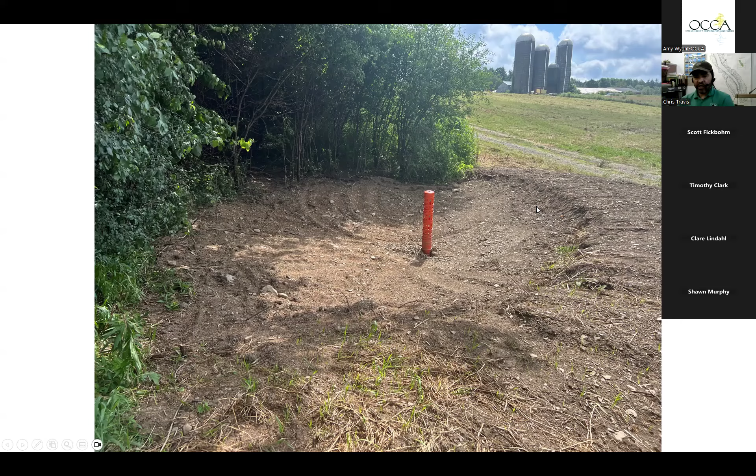Likewise, here's another WASCOB. This one you can see much more - not quite as well formed, much more of the topography working for us here. This is again the same farm, just a little bit further down, and the same excavator and contractor cleaned all three of these for us.

Likewise, this is on another farm field. We're not quite down to Skaneateles Lake, but we're getting there. As you can see, one of the reasons WASCOBs lose function and become less operational - one of the things that frequently gets us and our farmers in trouble - is operations and maintenance. O&M can be vital to the functioning of these BMPs within the 10-year lifespan of the vast majority of our BMPs. Granted, these had all exceeded their 10-year lifespan, which I think is standard for the WASCOB.

However, part of the reason that their functioning had decreased was because there had been no maintenance whatsoever. This particular WASCOB was all cattails, and actually we had to snake the standpipe there and try and figure out what was going on with the underground outlet because that was not functioning as designed.

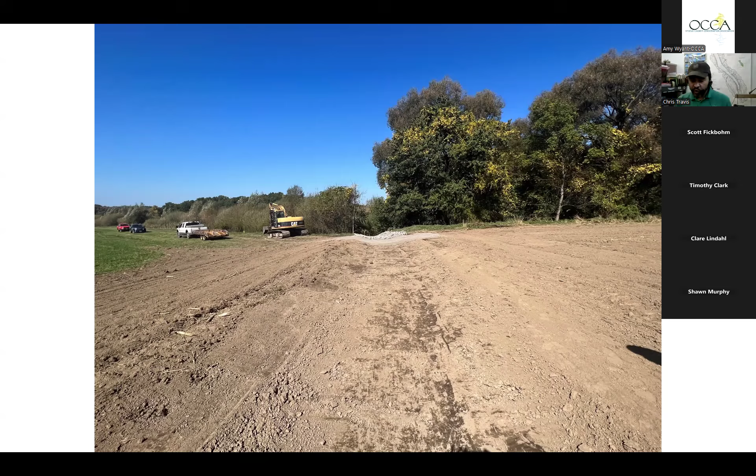So we proposed, and with the farmer's permission implemented, this 300-foot, I think it was 200-foot, diversion slash grass lined waterway. This is the implementation during, and this is after it was completed, and you can see our heavy straw mulch. And then this is, of course, me standing at the outlet now, Shotwell Brook immediately behind me, looking back up into the farm fields here.

So we really like the diversions in that they are minimally invasive, they are easy to implement, and they're very cheap. Most of the expense for these is honestly the stone, and sometimes, I guess, the excavation work if it gets really big.

Now, also in the foreground, just behind the outlet here, you see a broad-based dip. This is something we implement quite frequently here in Onondaga County, in that our diversions are often immediately adjacent to the outlets. We're right there by the headlands, and this is where we would want the farmer to be able to cross this diversion without damaging or rutting it. So quite a few of our diversions have these broad-based dips such that the farmer can still get his equipment across without rutting up our diversion per se.

This is another diversion, same farmer, other side of Shotwell Brook now. We were having similar issues up there in the distance where you can see that hay bale far away. So the water comes down the slope, and believe it or not, it would make a turn and come down towards our truck here. It's all based on the topography. And this was some quite significant rilling, and we had like some one and two foot gullies starting to form across this farm field.

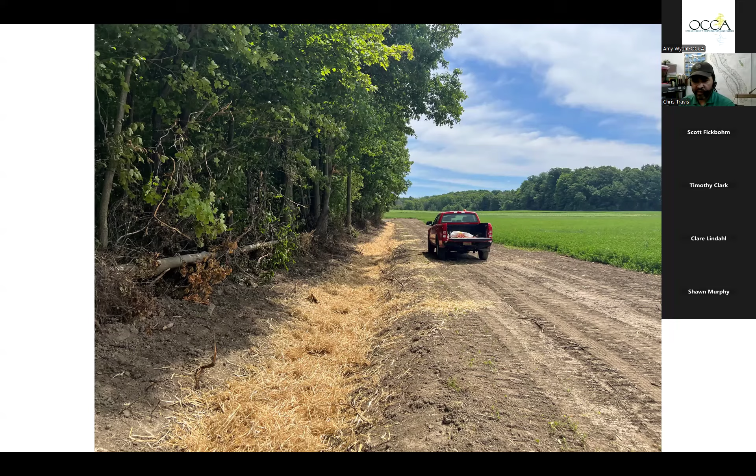And as you can see, it's shallow, it's deeper, but it's also quite a bit narrower. So this was just after implementation. As you can see, we've got the truck and we've got the hay. In the very distance there, you can see the interns doing the seeding and mulching for me.

So this is where the water came down. The water would come from the right, go across, get past this hay bale here, and then it would turn and head down there towards the trucks. Shotwell Brook is in the distance where you can see those willows popping up past the alfalfa. So with this, we're grabbing the water as it comes down the slope.

Once again we've got another broad-based dip so that the farmer and his equipment can cross without damaging the diversion.

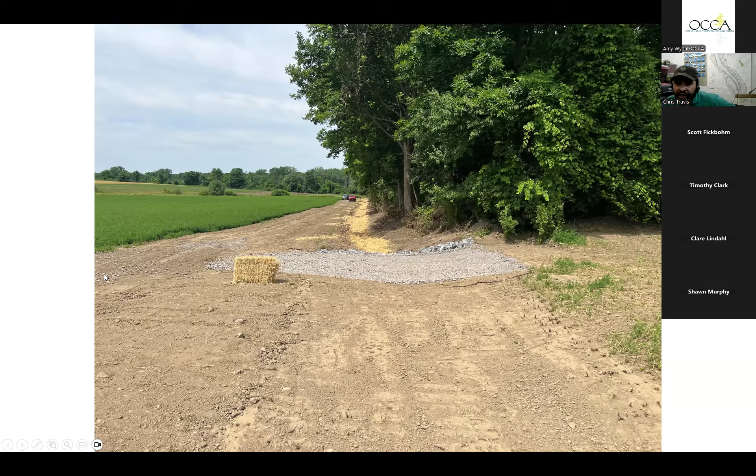And we actually put an inlet here so that some of the stone is so that during the high flow events, it's not damaging the inlet to this diversion. And so here, this is further on in the season, how it's going. I chose the picture without the velvet leaf because, well, I didn't want to show the picture with the velvet leaf. But this is the same diversion.

So as you can see, it came along pretty nicely. We've been out there in some real big storms, and it is functioning as designed and as planned. Once again, the efficacy of these is pretty much in the fact that they're really cheap and they're really easy. I think I've probably worked on 10 to 12 diversions at this point. Maybe 3 or 4 WASCOBs, and similarly 5 or 6 stream crossings, right? So that's another reason why I said these are the big three.

Nothing like being in your first staff meeting, and people are throwing around terms like WASCOBs, and I remember sitting there saying, "What in goodness gracious is a WASCOB?" And you're in government when everyone's speaking in alphabet soup, right?

So at any rate, continuing walking down. So Shotwell Brook is down there, and this is ultimately outletting into Shotwell Brook. Moving on, the stream crossing. So the stream crossing, another structural, not so much in the fact that we're trying to capture the water, but we are trying to decrease the turbidity and the potential for the sediment migrating, right?

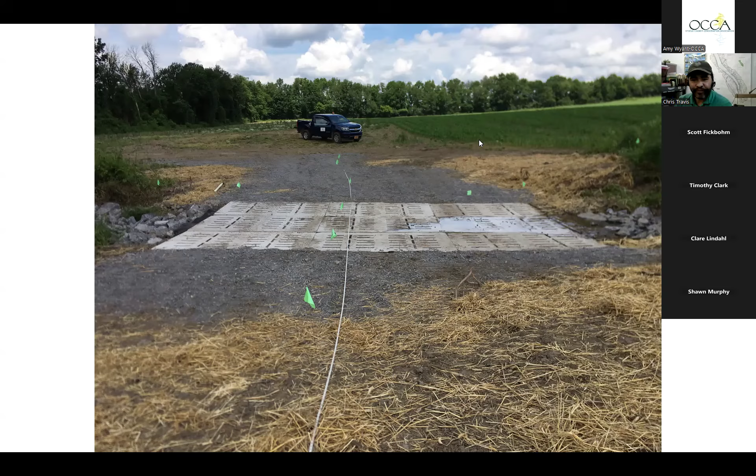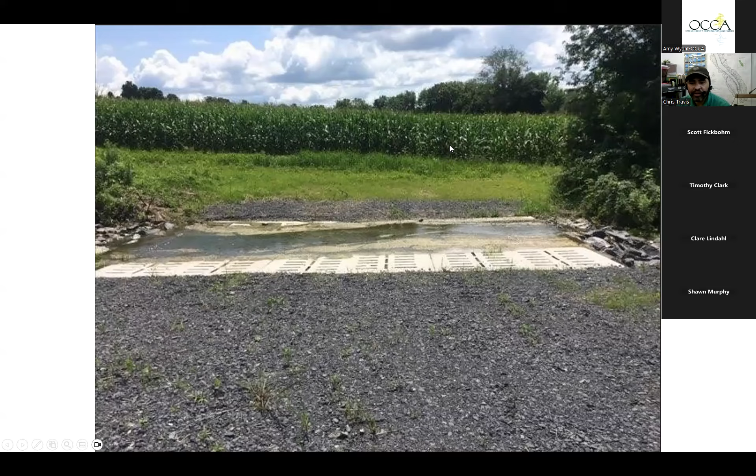This is it the following season. As you can see, the water is now moving over it, and it looks much more natural and established here. I'm not sure if this is when Tim and PJ came out to see it, but at any rate, this is another one I implemented on Grout Brook, the famous Grout Brook, at the southern end of Skaneateles Lake, from which award-winning trout are pulled every year.

This is one of our farmers down in the Homer, Cortland area. This one was also particularly a headache to permit through the DEC, but all things being equal, we got it in. So this was obviously a much smaller crossing. That is what you would expect in your usual farm crossing. And this is what it looked like a season later. So you can see that the substrate has started to move over it. It stops looking so much like a bunch of cattle slats stacked in a stream, and starts looking more natural.

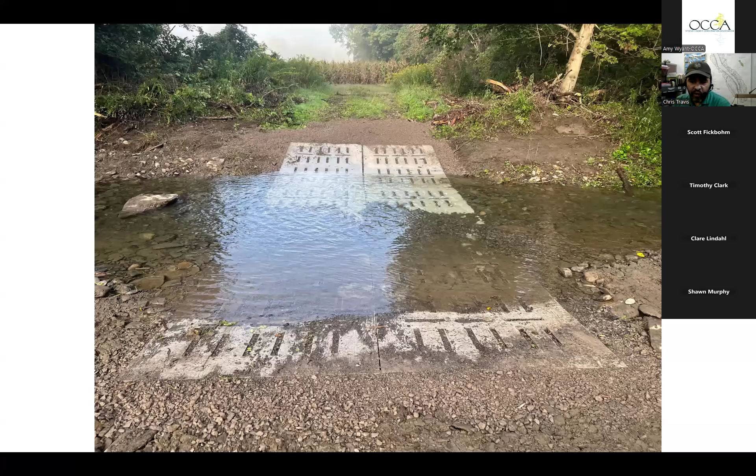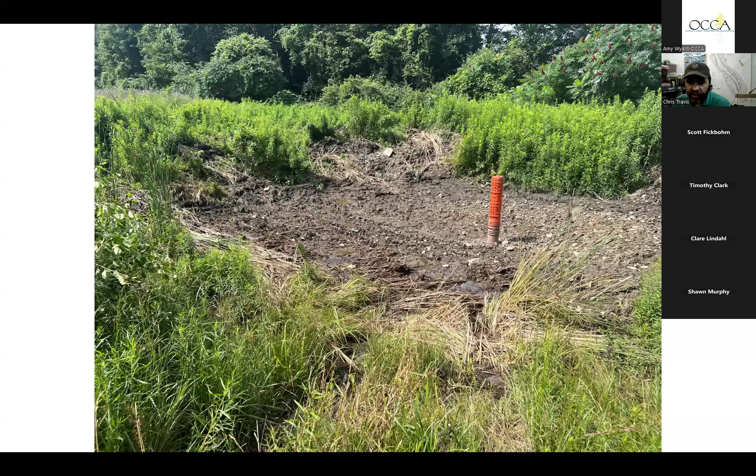So, as usual, I talked way too fast and got through my material far too quickly. So I'll just return to one or two topics that I kind of breezed over. I don't want to hit on it too hard because I know Tim has a wonderful set of classes on Udemy, where you can learn to do the stream crossing and you can learn about hydrology. And that is something that is encouraged in all of our soil and waters, that you take Tim's classes, which is where I was first introduced to the stream crossing BMP.

That's why I didn't want to get into this too much, but I did want to mention again these programs. EFH2 and EFT are very helpful for the design process. Of course, you can pull out your chapters in NRCS 650 and do these by hand, but having these programs facilitates the design process enormously. EFT, Engineering Field Tools, is a little bit clunky. At one point, my IT department made me pull it off because it was apparently a risk for hacking. So it's also something to keep in mind that sometimes these programs are not quite as functional as you would like them to be.

And also, we frequently need to check for the most recent update to minimize our risk, because these days we all know that the risk of bad actors is pretty prevalent. So that was the long and short of it. Chapter 7 in the NRCS 650 is grassed waterways. Chapter 9 is diversions. Chapter 8 is terraces, terraces slash WASCOBs. Obviously, I'm not getting into the design process here, but pulling out one of those chapters will walk you through it in intricate detail.

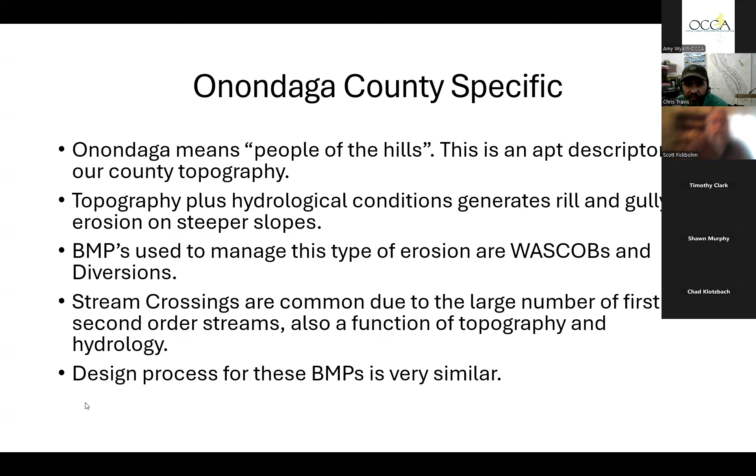Great answer. Thanks. Yeah. Chris, I wanted to thank you for your presentation. I also had my hand raised, but I want to give other folks the opportunity to ask questions of you in the remaining minutes that we have here. So if anybody has a question, now would be a good time. I have a couple, but go right ahead, Scott. There is one question in the chat.

It says, has the state considered moving over to using HydroCAD? I know that at our symposium last year, they did a HydroCAD training. I did not sit in on it, but I do know that it is being taught to our technicians. The issue we have, and I'm sure you guys can relate to this, is that so many of the soil and waters are these sort of autonomous units, and they don't all function under the same software suites. I mean, everyone's got Word, but we don't all have CAD.

We don't have CAD in this office, so that's why I try to use EFH, right? I can bug my director to get us CAD, but we all know that sometimes works, but sometimes it doesn't. And also, these subscription services now, right?

So it's several $1,000s a year for the CAD. And actually, what he's asked us to do is research open source software this winter. So, QCAD and those sorts of things. He's asked us to look into that because I've expressed if I'm going to do this FEPE thing, I should probably have a CAD resource that I can use.

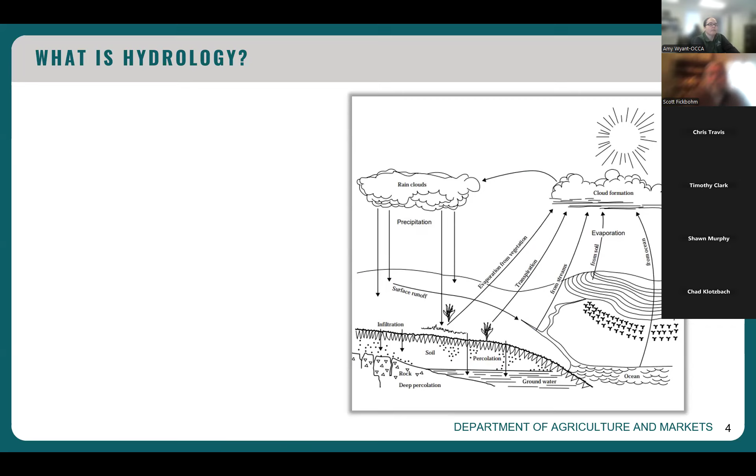Right into the background section, just a brief overview of what is hydrology. Hydrology is this cycle of water that goes across the land. Some goes into the ground, goes into the oceans, comes back up into the sky, makes clouds. Clouds form rain, and this whole hydrologic cycle is what we are referring to when we say hydrology.

It's the properties, the distribution, and the movement. So not only just where the water's going, but what is it carrying? What salinity? What are the properties of it? Land, underground, oceans, and atmosphere.

And what we're most concerned with in conservation work is called runoff hydrology. We're looking at rain that falls on the ground, runs off through a watershed down to a design point.

So these are some practices that need hydrologic designs. Some of them that Chris covered in the first presentation: diversions, terraces, urban closed drainage networks need this kind of design, flood control, green infrastructure, stream restoration, culverts, manure storages—basically everything that's out there on the landscape that can be subject to rainfall. You need some sort of design of how much rainfall is going to come down to it, and a way to either get rid of it or manage it safely.

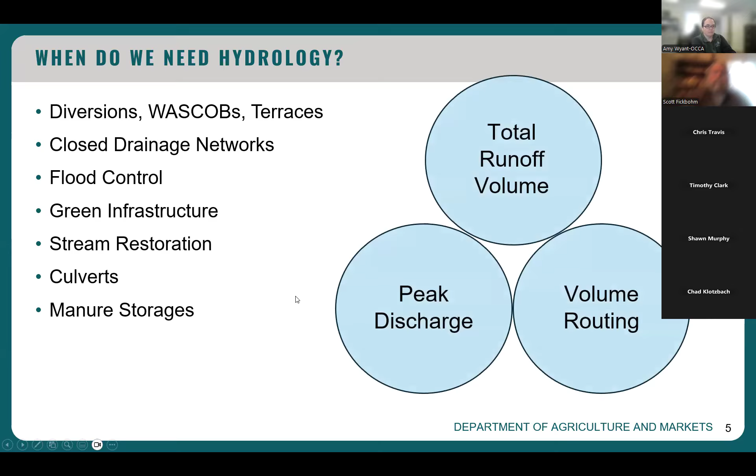I look at hydrologic designs as three different practice areas, if you will. The total runoff volume, that's how much rain runs off the surface of your watershed. And then other practices will need to know the peak discharge—that's at a design point down further in the watershed. You're going to have to know how much water per second is flowing past your point. That's different from total runoff volume; the total runoff volume is just a volume, it doesn't have anything to do with the flow rates coming down through a stream. That's peak discharge.

And then a third component, which we're not really going to get into in this course, is called volume routing. That's where you model a volume of water that is moving through a system or a structure—say moving a large volume of water under a bridge, through a sluice gate, over a dam, or through a spillway. That gets more into hydraulics, but it's an associated part of hydrology.

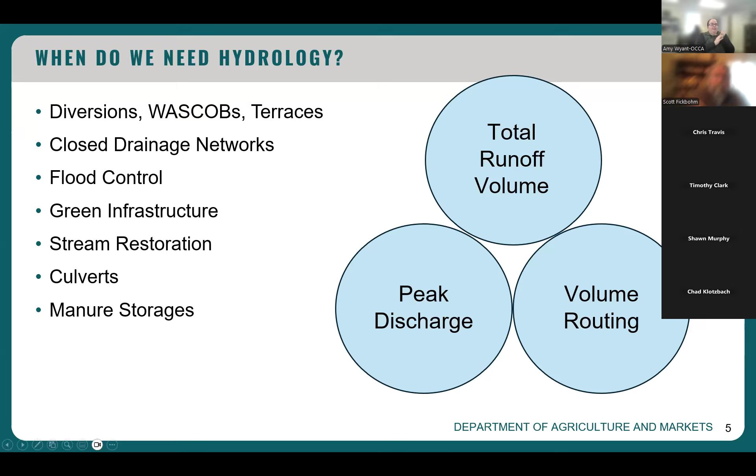We have a few different methods for completing hydrologic models or hydrologic designs. I think the best source of information is usually stream gauge data. That's when you have a bridge and there's a gauging station at the bridge that records stream flows there for every minute or every hour. That's really the best source of information. If you have a bridge at a gauged site, that should be the information you're using to do the design.

The next best are called regional curves, and these curves are scientifically derived from stream gauge data on a regional basis. You wouldn't develop a regional curve for the entire Northeast United States or even the state of New York—you develop regional curves for smaller ecological or weather regions in the state. So these regional curves are what StreamStats is based on. The scientists that developed StreamStats created all these regional curves, and they created regions across the state that have uniform weather patterns and uniform topography.

Next best is where we get into hydrologic modeling. These are the SCS or NRCS methods, and that's the focus of this presentation. For rural hydrology, we'll be using the EFH2 method. For urban hydrology, typically we'll use TR20 and TR55 with some more advanced time of concentration methods we'll get to in a minute. Last up, I want to mention the rational method. This was the first hydrologic method I learned when I was starting. It's used mostly for storm sewer systems, a kind of simplified method. It gets the job done, but it comes in last place here.

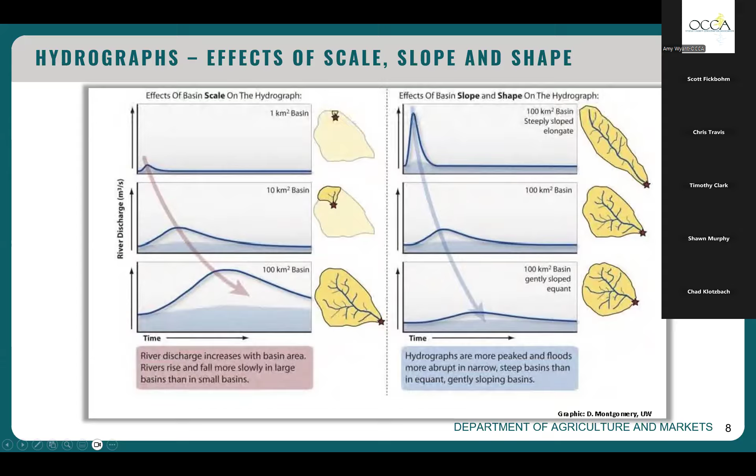Throughout EFH2, there will be warnings and caveats, like don't use this procedure for complicated situations, particularly if there are ponds, wetlands, or storage in the watershed. They give guidance to use the procedures in NEH 630 instead. That's another chapter in the National Engineering Handbook, just called Hydrology. So remember, there's the Engineering Field Handbook, which is inside the National Engineering Handbook — this is just another chapter that covers hydrology in extreme detail, with hundreds of pages on a ton of different topics. As you might expect from hydrologic modeling, they suggest the state of practice: split the watershed up into smaller sub-catchments, model storage individually, and break it up in as much detail as you can if you have storage, ponds, or wetlands.

Okay, any questions on this introductory part? Going to move into rainfall.

Rainfall, the way we bring rainfall into hydrologic modeling, is with rainfall distributions. This is like how intense the rain falls over a theoretical storm. We use these 24-hour storms as a theoretical storm that we can drop over the landscape and run through our practices, and it kind of represents a bad thunderstorm in the summer. Historically, we had distributions called type 2 and 3, and I think there was a 3A, and they sought to mimic rainfall patterns in different parts of the country. I think most of New York was type 2, Long Island was a different type. Anyway, there's a storm duration of 24 hours, and the intensity of rainfall varies over the storm period.

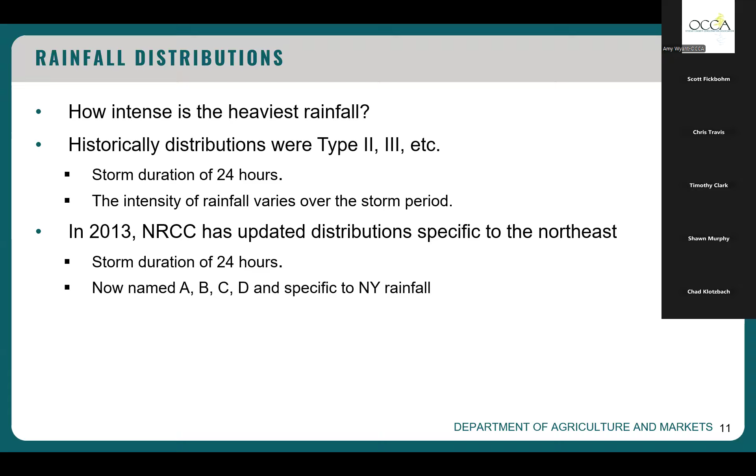So there's basically two ways that we get rainfall depths. I guess three, I forgot about the Cornell data. I recommend most people, if you're going to try and do a site-specific rainfall, to use the NOAA Precipitation Frequency Data Server. That's NOAA's official website, and it's updated with all the latest and greatest. It's an interactive map. You go to your site and you click it, and that's how you get site-specific data. A lot of people that use HydroCAD modeling will use site-specific data. It's kind of the best practice.

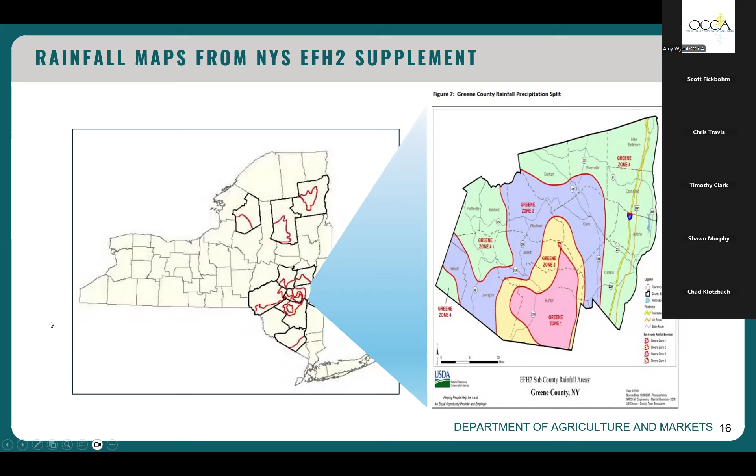This is in the EFH2 supplement, and it's also kind of baked into the EFH2 software. But in the supplement, there's these charts where you can check the rainfall values. So for each county, if there's separate regions, it'll give different rainfall values for those 2 regions.

All right, so moving on from rainfall, we're going to quickly go through mapping a drainage area. Any questions on rainfall?

Tim, I had a question on rainfall. Go ahead. I'm sorry, I'm not familiar with these processes and I'm prone to asking stupid questions, so this may be one. The distribution maps that you were showing, is that the distribution of the amount of rain that falls? In other words, are these types, like where a lot of rain falls, and type D where not a lot of rain falls over the course of a year or some time period? Or, are there parts of the state that are particularly dry or particularly wet?

No, it's taking a storm and trying to predict how intense the most intense rainfall is. So in the synthetic distribution, we have this middle part of the storm where most of the rain falls. So curve D has more rainfall in the first part of the storm and the last part of the storm. Curve A, the blue line, has the least amount of rainfall in the beginning and the end, so curve A has the most steep part in the middle of the storm. So they're saying that curve A has the most intense of the intense rainfalls.

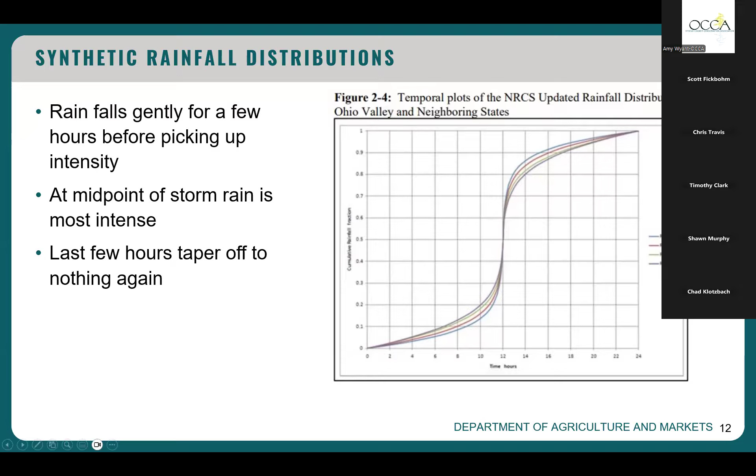So if you jump back to the map, it's trying to gauge which regions have slightly more intense rainfall during the most intense period, it's not even a big difference. And it's just based on aggregating rainfall storm data over the last 40 years. Thank you for that.

So mapping a drainage area, if you want to do a hydrologic study, you'll need to know what your drainage area looks like and how much water's coming down to it, to your design point.

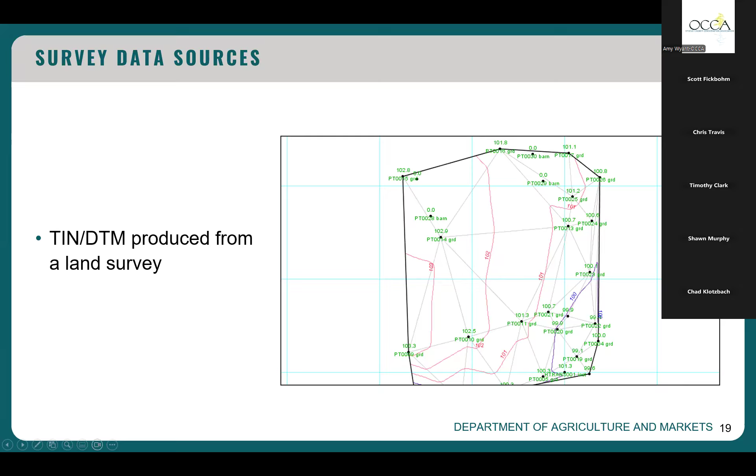In the worst case, you'll have USGS mapping. This is not as detailed as the other sources.

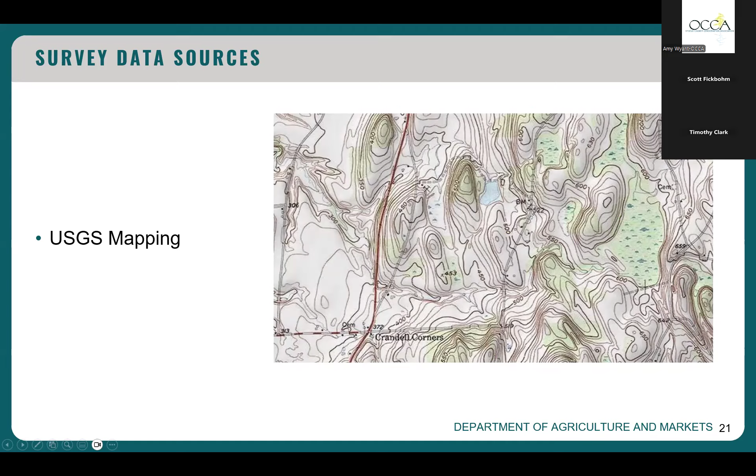And then to map out a drainage area on something like this, we got to start from your design point. That's going to be the place where your built practices, your WASCOB, or the outlet of your diversion or grass waterway is. You work up through the watershed going perpendicular to contours.

There's some general rules. If you're on the nose of a hill, your watershed's going to go perpendicular right down the nose of the hill. If you come to a saddle, that'll be a divide in watersheds. If you're on a water course, the contours always point up the hill.

And like when we do in-person classes, we'll do a bunch of exercises where the students delineate a watershed, because it's pretty important. Even today with software tools that kind of do it automatically, you need to have some ground truthing experience to be able to pick out little errors and stuff.

So for this watershed, this is an example delineation. It's somewhat subject to opinion and interpretation. For example, coming up this slope, it's possible that it reaches all the way to the peak, or it's possible that the water splits and diverts below it.

Ditches often have an impact that's not visible in LiDAR, or sometimes not picked up on ground surveys. So the ground truthing aspect — whatever level of risk you're willing to assume with kind of the shoddy modeling, you have to make up for that with ground truthing. So if it's a really key important structure, you've got to make sure you're out there checking where the ditches flow and if there's natural impediments that weren't picked up on your survey.

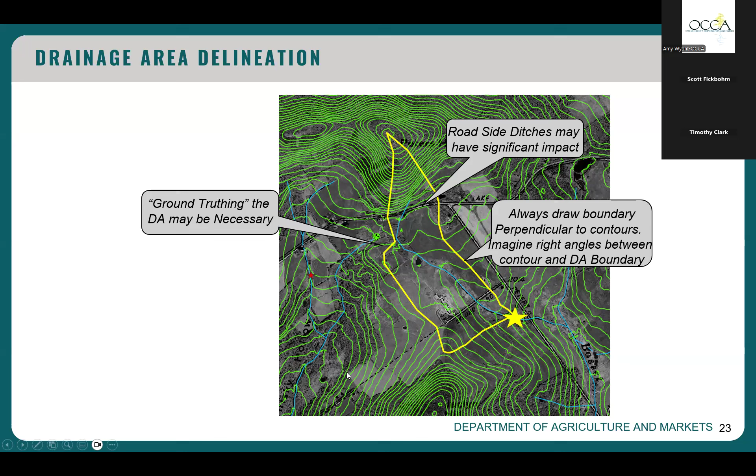Want to mention StreamStats. Hopefully most people are familiar with that. This is a pretty old screenshot, but it looks kind of the same. StreamStats lets you delineate the watershed from these blue lines — I'm not sure if they're just the blue line stream network, but it has to be pretty much a delineated stream in order to do the watershed. You can't just pick a random point out in space, but it'll delineate a watershed and do statistics for that.

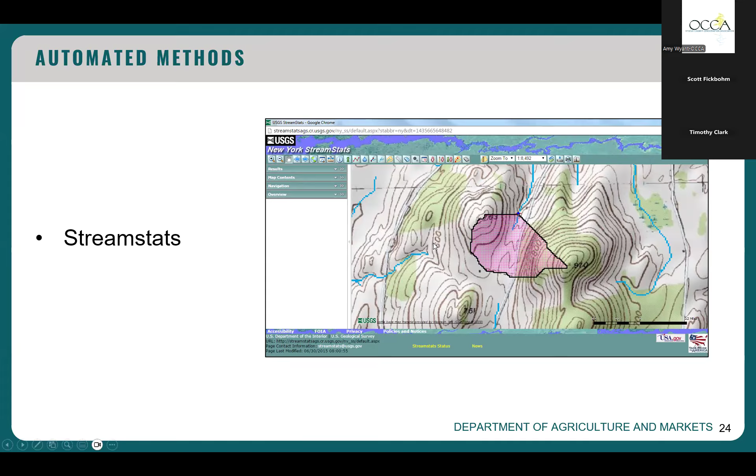And you can export this into GIS. Speaking of GIS, lots of people use GIS tools to delineate watersheds, and there's pretty good LiDAR data for the entire state. This is a screenshot from the NRCS engineering tools for ArcGIS Pro, which is a good hydrology package.

It's kind of being phased out in favor of something else, but districts can use this. It's a little bit buggy. Anyways, it's an example of a software tool. It uses pretty much all built-in tools in ArcGIS Pro. So if you're just doing it on your own, you also have access to these delineation tools.

I'm going to move out of delineating the watershed. Any questions on that?

Our next topic is runoff curve numbers. So this is where we get into trying to figure out how much of the rain runs off the surface of the ground. And it's governed by an equation — this is the NRCS runoff equation.

I don't expect you to memorize this, but anyways, Q is the runoff in inches. It's a little confusing because sometimes we use Q as a flow rate for hydraulics — but in this case, Q is just runoff in inches. P is rainfall in inches. Ia is initial abstraction, and S is the potential maximum retention after runoff begins.

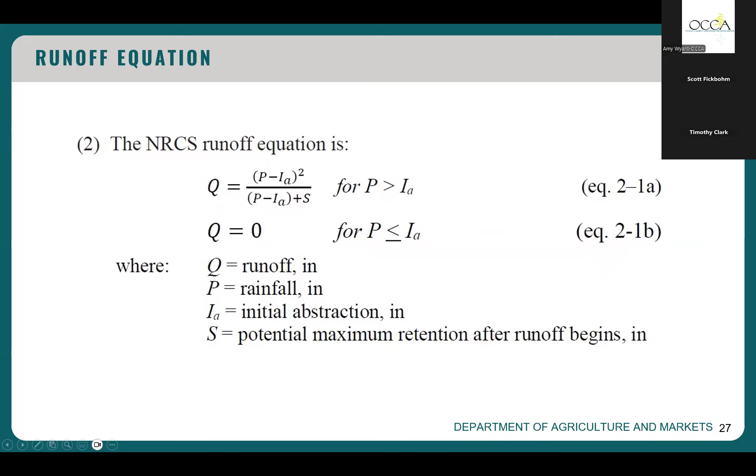And then, going back to the formula, hydrologic modelers simplify these formulas. So they have a simplification for this, which becomes this one. So the flow rate is this term if the rainfall is greater than IA, and then the runoff is zero if rainfall is less than IA.

So, like I was having you imagine a minute ago, if your rainfall is just a very light storm and doesn't go over the threshold of the initial abstraction, you won't get any runoff. And that kind of makes sense, especially think of a hot summer day, a very light rain, on an asphalt parking lot that's 200 degrees. You won't get any runoff from that if the rainfall is light enough.

Runoff curve numbers are just kind of, I don't want to say imaginary, just a convention that's been created to use to model different surfaces. So the curve number itself doesn't have any relation to a physical attribute. A lot of people will get confused and think that the curve number is the percent of runoff. That's not right. It's an abstract term.

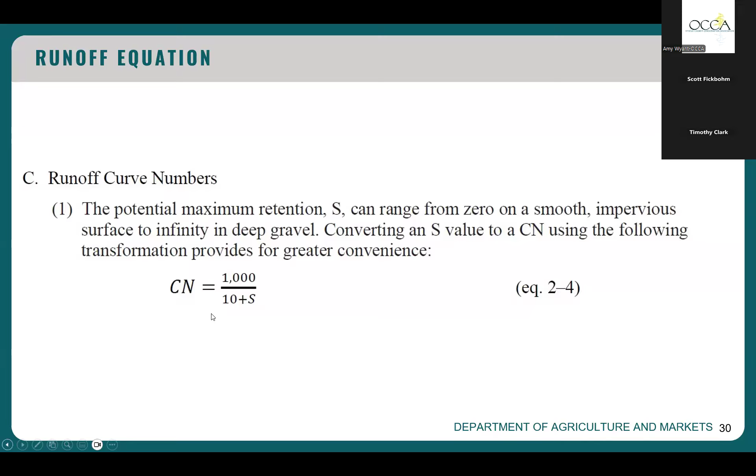So in the literature, curve number is 1000 over 10 plus S. S, if you recall, is the water retained after runoff begins. So initial abstraction is the water that's retained before runoff begins. S is the water that's retained after runoff begins.

Shoot, I thought I had a different slide in there. Yeah, okay. So we're just doing curve numbers. So this is the curve number that's 100. It generally goes from 40 to 100. There's a mathematical error if you use a value less than 40, it's like a divide by zero error.

Okay, and if you're using the EFH2 software, all these curve numbers for different land uses are listed in the RCN tab. Similar for HydroCAD, it has all these curve numbers built in. Basically, for each land use, say you have woods-grass combination, you'll get 3 different scores, a poor, fair, and good condition. And then for each hydrologic soil group, you'll have a different value. A soils infiltrate the best, D soils infiltrate the worst. So the curve number values will always be higher for the D soils than for the A, B, and C soils.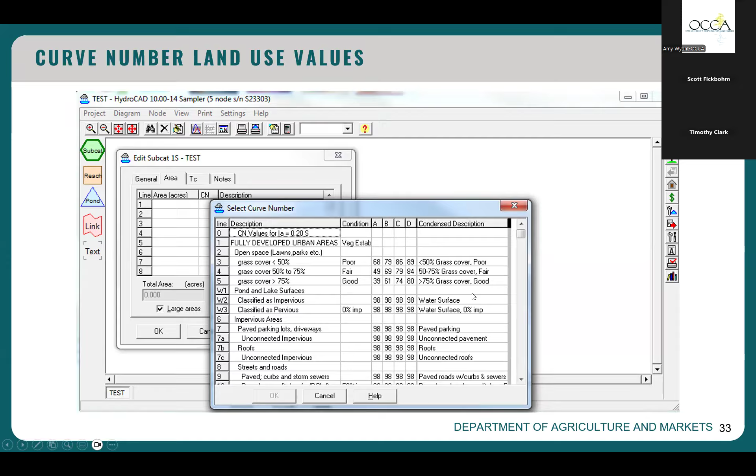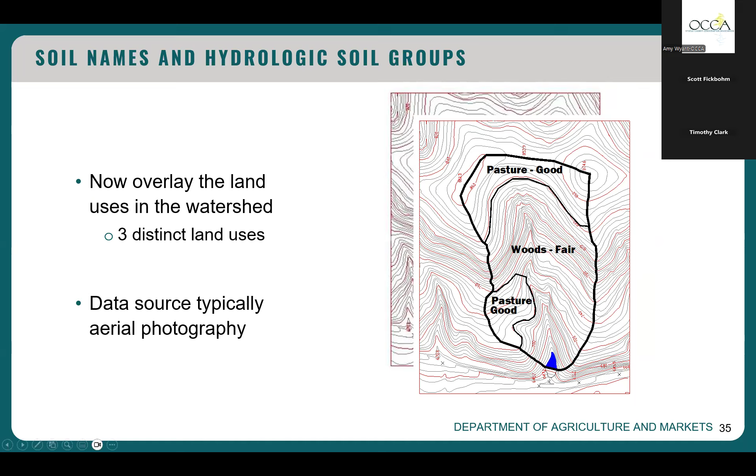Once that's overlaid, you'll get a bunch of intersections, which splits the watershed up into a bunch of sub areas. So in this example, we have 5 unique sub areas with unique ground conditions and hydrologic soil groups.

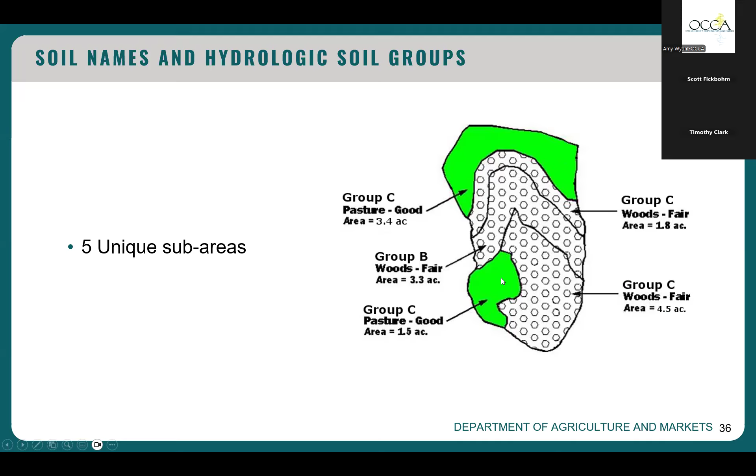And then for an entire watershed, common practice is to compute a weighted average of all these curve values. Each software I mentioned, EFH2 and HydroCAD, has these calculators to help you compute a weighted average curve number for the watershed to use for your model.

All right, so that is kind of a brief overview of curve numbers. I'm going to jump into runoff volume. Maybe speed up a little bit here. Runoff volume.

I'll just throw out an example. Say you have a site, you've computed your curve number like the previous method or the previous slides. You've computed the curve number to be 80, and your site receives 4 inches of rain. How many inches of runoff are produced? This is like an erosion and sediment control question. We use this kind of inquiry to size a sediment trap.

You can go to your curve number chart, look for the 80 curve, which is this yellow one. You start with your rainfall at the bottom, 4 inches, read up on the chart to the yellow line of 80. And then read to the left, which will give you direct runoff Q in inches. So if you have a rainfall of 4 inches on an 80 curve, only 2.04 inches of direct runoff will come off that watershed.

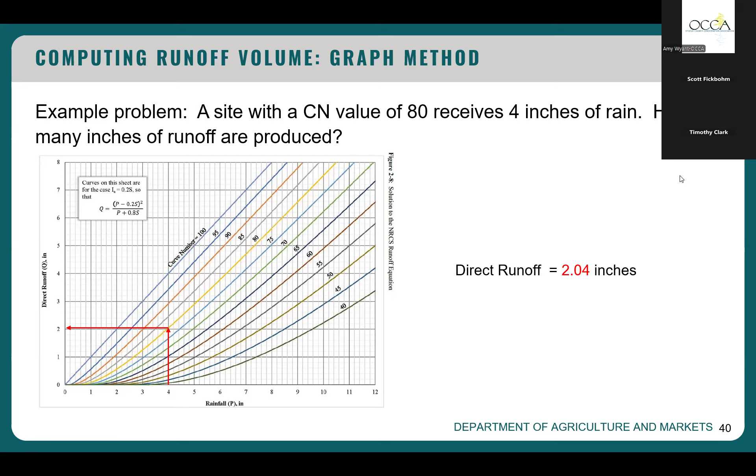All right, that's just inches. You would have to multiply that by the area of the watershed to give you a volume, storm volume. And just for your information, there's charts of a lot of this stuff. This is in the EFH2 chapter. You can go to a chart, and it's kind of the same basic information. Rainfall in inches, runoff curve number, and it'll give you the inches of direct runoff for those storms.

So here, again, we're going to 4 inches, reading over to the 80 curve, and it gives you 2.04. So if you have a problem where you need the storm volume, that's the procedure to get there. To get the peak discharge is a little more complicated, and we're going to get into that next.

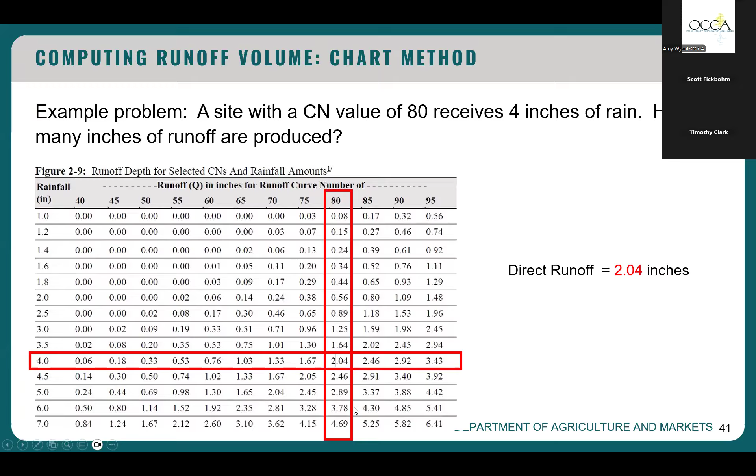So in order to get a peak discharge, we kind of have to know how fast the water runs off your watershed. Remember that slide back near the beginning, different shaped watersheds have different times for the peak flow to get down to your design point, depending on how steep the watershed is, how big it is. And the way we model that is called the time of concentration.

For urban hydrology, there's various methods, usually involving breaking your longest flow path into different segments, which can often include gutters and storm sewers, gutters and ditches, that kind of thing. Typically for rural or agricultural projects, we'll use this NRCS lag equation. It's meant for rural watersheds where you don't have a bunch of built infrastructure carrying the water along. It uses these terms: the flow length, the curve number, and the average watershed slope.

So in order to compute the time of concentration, you'd be looking at the flow length. It's just a length through the watershed of the maximum flow path, from the most distant point all the way down to your design point. So that's a flow length in feet. And then the average watershed slope. I recommend most people use GIS tools these days. Spatial Analyst can just do an average inside your watershed over a LiDAR raster. That's the easiest method.

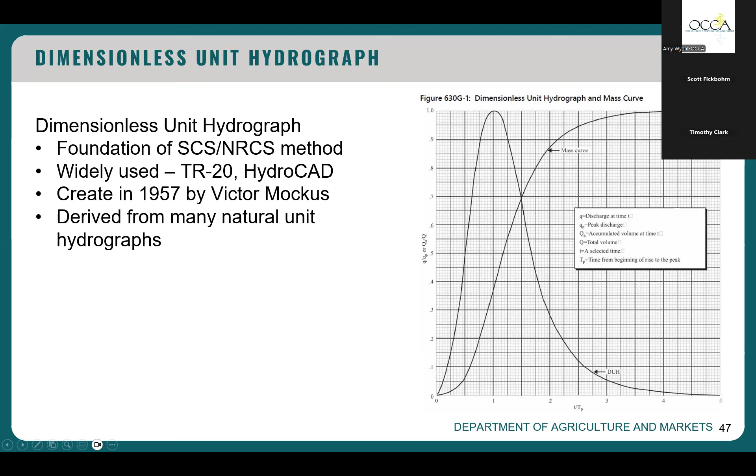So basically, this is a dimensionless hydrograph with no set values for time or discharge. And then we use software to map this shape onto our real design storm, real rainfalls. Part of the derivation for this peak discharge method uses the equivalent triangular hydrograph. There's a derivation for this in NEH Part 630.

If you're interested in learning more about the unit peak discharge method or equivalent triangular hydrographs, you're basically looking at how much rainfall falls in the first part of the hydrograph, and for the one that Victor Mockus came up with, it's 37.5%. I'm not going to go through the whole thing, but if you know 37.5% of the rainfall is in this portion, you can use that information to divvy this up into little segments, compute the flow rate at each point and the peak discharge.

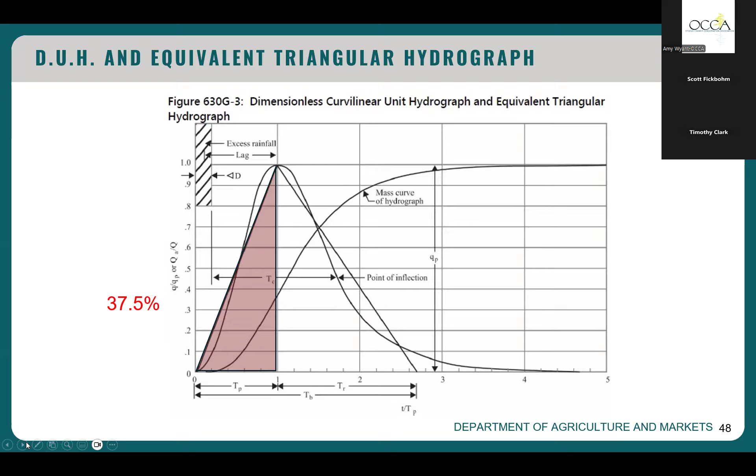If you're using software, EFH2 is commonly used by most of the districts. As we discussed before, HydroCAD is in pretty good use too for more complicated designs, and a lot of engineers use it.

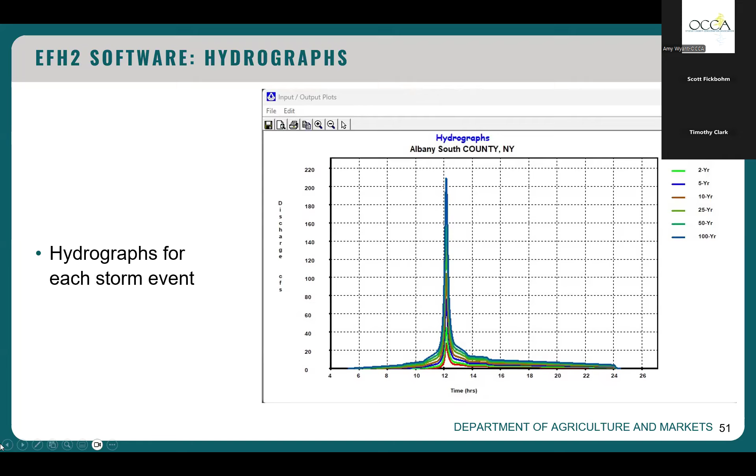So if you're doing it as a design where you need, say, a drawing of a hydrograph and a peak discharge, you can use EFH2 and lag method for the time of concentration to get that. Again, if you're doing a design where you just need the total runoff volume, you can pick that up off the curve number chart. And if you need to do design where you're routing a volume through a built structure, you want to use HydroCAD to model that in more detail.

So that pretty much wraps up my overview of hydrologic modeling. Kind of glossed over a lot of areas. So if there's any detailed questions, feel free to shout those out.

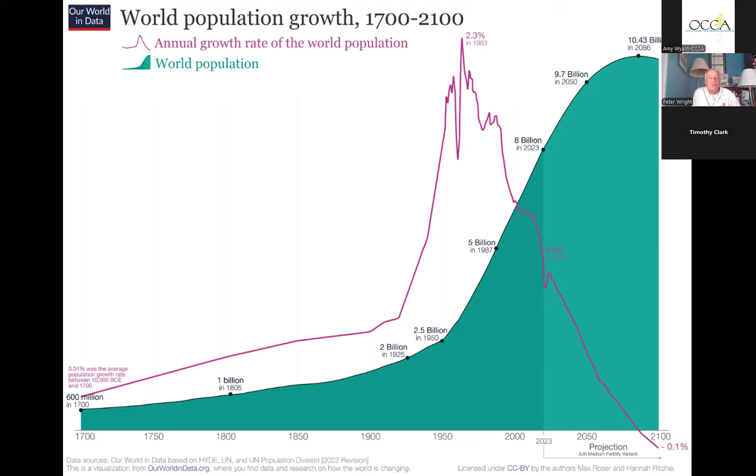Okay, why do we care? We care about agriculture. Agriculture is vitally important because we've got to feed the people. And it's important to know that we've got to feed the people as we get more and more people, with the same amount of land. We've got to do it, and we've got to do it sustainably. And I think that's our challenge, right? To move our agriculture system towards sustainability. And that's going to take a lot of engineering.

So there's this broad spectrum of what agricultural engineers can do. And I think as you get involved in it, you have to experience that whole spectrum. It includes functions of civil engineering. All that hydrology could be right in civil engineering. Mechanical engineering, got to know how structures work, valves, pipes, pumping, that kind of thing.

Environmental engineering, we talked about sustainability, and that's all the processes involved in protecting the environment as we're dealing with agriculture, which includes erosion control, right? Water management, those kinds of things. It does bring in biological engineering, though, and I think this is the unique aspect of it.

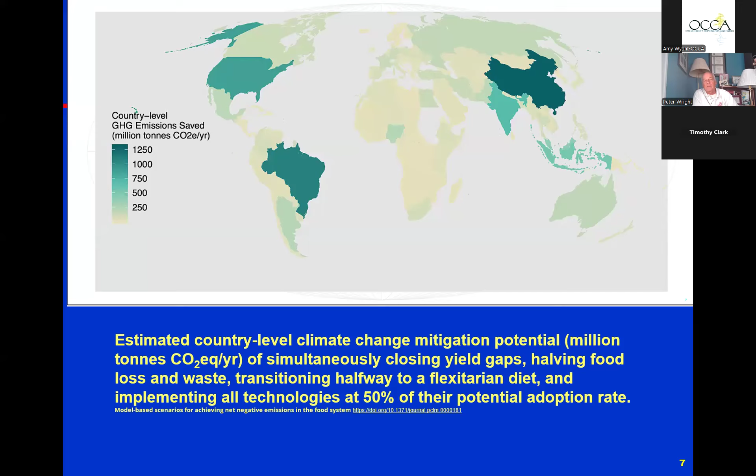And of course, where can we deal with this? And you see the U.S. does have quite an opportunity to make a change in the progress of global warming. We hit on this already, and so certainly thank Chris and especially Tim for talking about it. There's no question we're getting more and more extreme. The amount and peak of runoff is increasing. We're going to have more and more of a problem.

Engineers have got to figure it out, got to be able to deal with it. And that, of course, is part of the issues that have already been brought up.

One ethical issue that comes up is, okay, we know what the 50-year storm is now. So if we're designing a 50-year practice, wait a minute, what will the 50-year storm be 50 years from now?

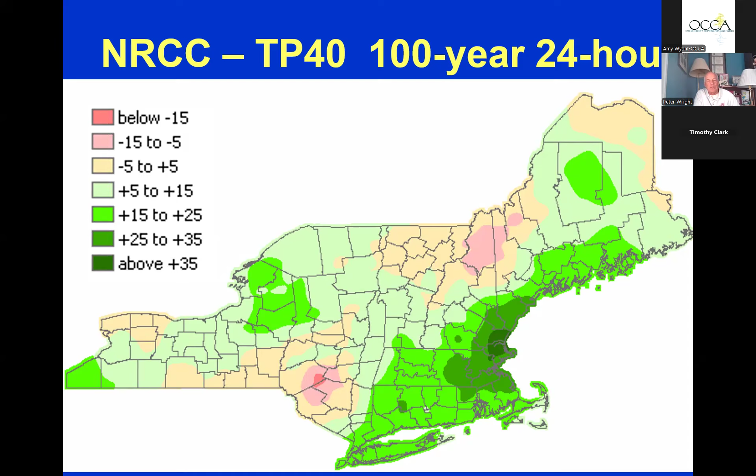And should we design for that? So the world is changing, and we have to figure out how to keep doing it.

So with climate change, here's the issue. We have more and more extreme events, so we need more and more runoff control. We've got to deal with those extreme events with either runoff control or even getting out of the way of the water.

One of the professors said the problem is not flood control dams. The problem is our cities, our houses, and everything are in the wrong place. We put them where they were close to water. Maybe we should move them out of there.

I'd tell that to everybody on the ocean, right? Don't live on the ocean.

The issue with precipitation, though, is in the Northeast particularly, we're going to get more and more of it. It may come in a fast amount, but we're going to get more and more of it overall. So drainage will also be a big issue. I think there's going to be much more emphasis on drainage.

Chris, as you design those WASCOBs and run the tiles down, I'm hoping you're providing enough capacity for drainage to those fields that can move into that same tile line. That would be a good thing.

Now, the other problem is not only are we going to get more rainfall, it's going to come at different times, and we are definitely going to end up with more droughts. It's going to be hotter, and there will be longer drought periods.

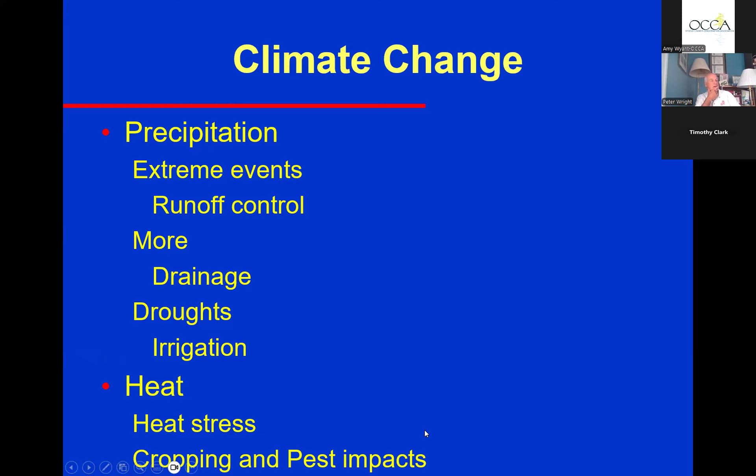We want to put the nutrients out at the time when they could be most optimally used and not lost to the environment, and that involves storing.

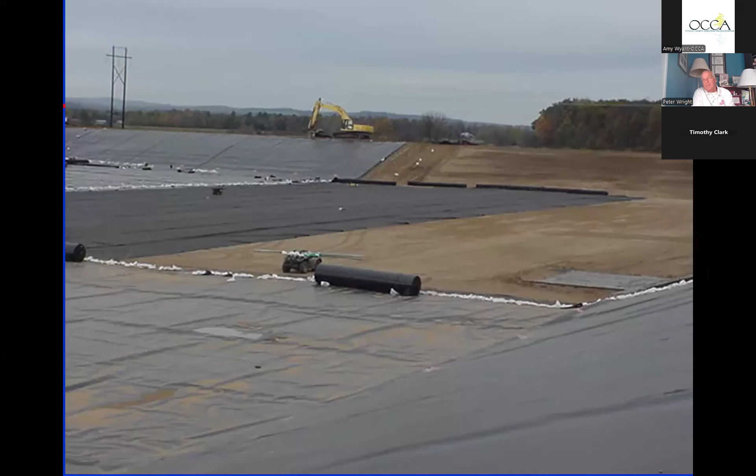Of course, there are a lot of different ways we can look at this. Who wouldn't want this on their farm? This is a wonderful storage, at least until it comes time to empty it. There are different materials for storage. We have concrete, we have earthen storage, and more.

I'd like to say the easiest ones have been done already. Farms that have the clay have the location for earthen storages. A lot of them have been built.

And now we end up with a more engineering solution to it, to put in liners, and you can see that's quite an operation to put those liners in.

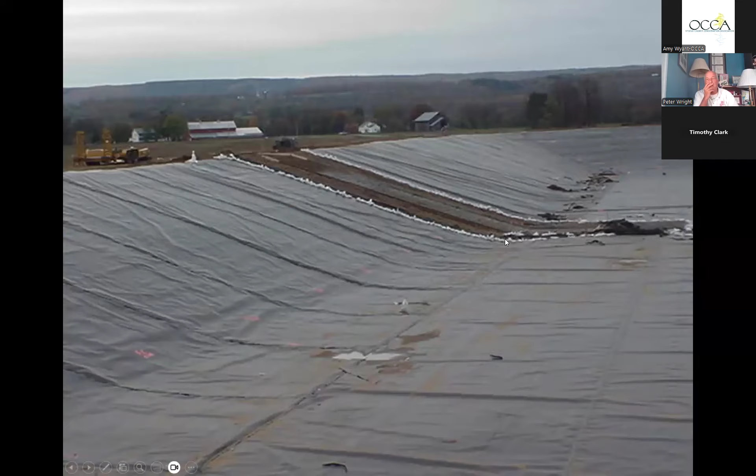We're collecting the rainfall water, which should be fairly clean, and we can pump that off, and that's water the farm doesn't have to deal with. We also, though, have the gases that are collected under this.

We can utilize and flare them so that it's not methane loosed into the atmosphere, but just carbon dioxide, which has a lower global warming impact. I might add that the carbon dioxide we'd be emitting after a flare actually equals the carbon dioxide that the plants took up to produce energy for the animals.

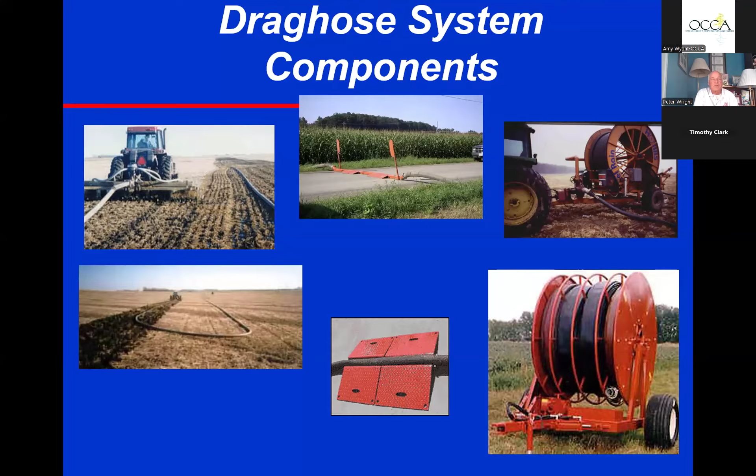You have a manure storage, you've got to move that manure quickly and efficiently out into the field, and the drag hose system is a wonderful way to do it.

It comes with a lot of mechanical mechanisms, one of which is the idea that you can actually measure in real time the nutrient content, or estimated nutrient content, as you're putting it out. You can coordinate that with your nutrient management plan. You want different amounts of nutrients, and really that would be a pretty effective way to apply the right amount of nutrients at the right time, the right rate, out on the landscape.

So I think technology is helping us move this forward.

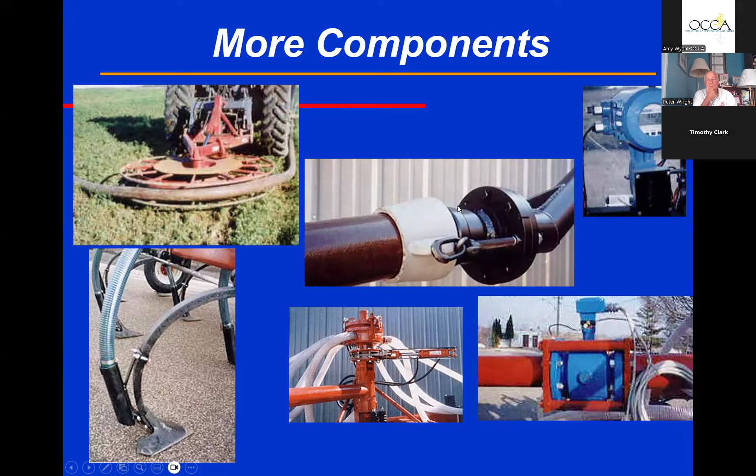Manure is not water. I think water would be the Newtonian thing here, where the shear stress gives you a uniform shear velocity. Manure is much more resistant to movement at low stress, but then once you stir it up, you actually can get it moving quite fast. I think this is an issue in all our manure management or manure treatment systems, and that is how to deal with that.

Storage does help us there because without a roof or a cover, you end up with wetter manure. You get it down to 4% solids and it will pretty much act like water, but when it's thicker than that, you have trouble dealing with it.

You've got to deal with pumps, and of course we're all familiar with this equation, right? The total head—you need to know what's the elevation we're lifting, and then deal with the pressure in the line. The good thing about drag hoses is you need very little pressure at the end, so that's also a good thing. And then, of course, there's the friction loss in our lines.

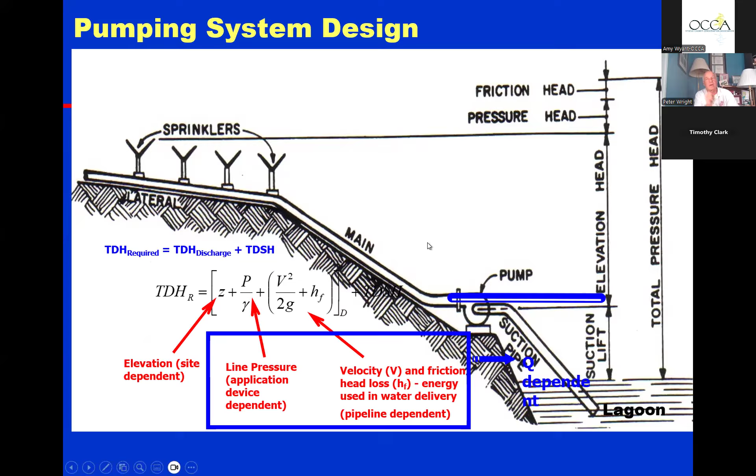Farms have been putting piping systems in, and I think that's a whole other engineering aspect of how to deal with those pipes, how long they'll last, and what size they should be. At first people were putting them in thinking, let's not spend a lot of money, but more we're realizing, because of this friction factor, that we'd be better off with larger size pipes.

Want to put a plug in for NRCS. I thought Tim might have mentioned it more, but he didn't, that the state has a lot of funding—this kind of mimics that. NRCS has all kinds of funding, different programs, which provide funds for farms to put in conservation practices, and I guess you all know that.

What they need, though, is people to do the engineering for these practices. So they've set up a technical service provider website, and you can go into this and become a technical service provider. So you actually get a payment from NRCS as an engineer in order to implement these.

The real way to make this work for a private engineer is to end up with, on the same farm, multiple practices, so that your travel costs are spread over multiple practices.

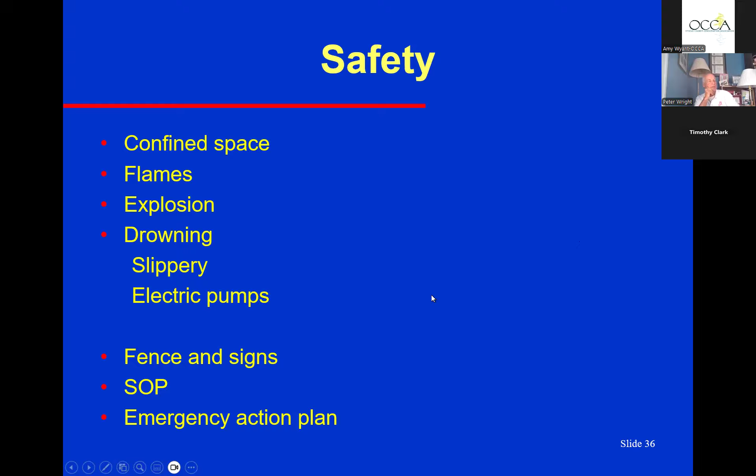So we were involved in the comprehensive nutrient management plans, and where does engineering fit into those? Manure storages are pretty much an engineering practice, manure transfer outside of the barn is an engineering practice, and dealing with barnyards, silage leachate, and milking center waste. These are potential contaminants, potential pollutant points on the farm that definitely would impact the health and safety of the public if they get turned loose in the world.

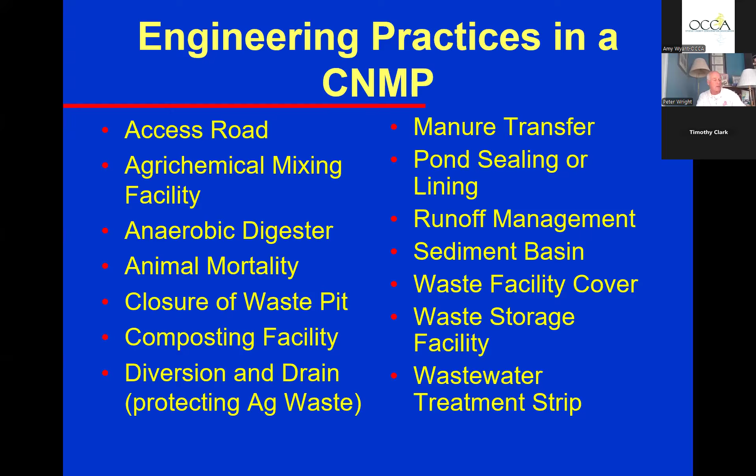So as we looked with the Board of Engineers in New York State, we came up with this list of what might be practices that could involve the health and safety of the public. You certainly can look at some of these and say, no, not in this case. But in many cases they actually would involve the health and safety of the public, and therefore they turn into engineering practices.

So the CAFO permit says, yeah, you will. Any newly installed engineering practice will be designed and constructed under the supervision of an engineer, and you'll have the documentation. And so this is why we need engineers working with partners in the field to implement these agricultural practices.

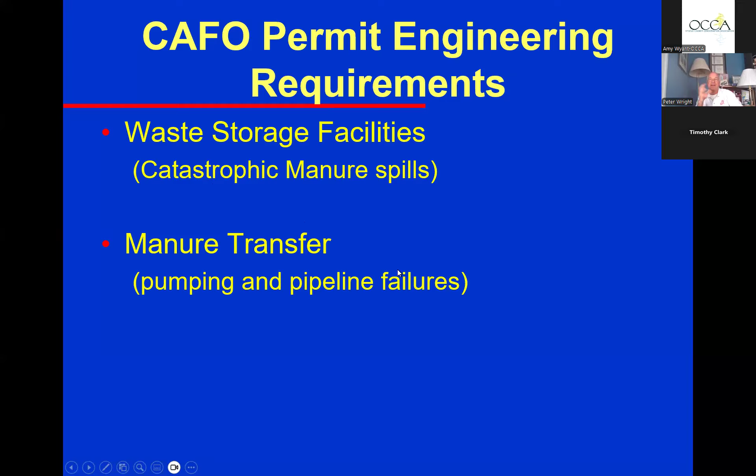They came about, of course, because of waste storage. We had some catastrophic manure spills, so there you have it. Manure transfer, we had pumping and pipeline failures, so this brought the attention of DEC onto these practices, especially that we need to deal with.

So again, all new ones need a professional engineer. They have an arrangement with NRCS that if you're working through NRCS with proper job approval authority, that works as well.

An issue with all of these, though, is it's not only build it, but they got to be operated and maintained appropriately. And I think that is some place that we all fall down. We like to say, oh, we built it, check, and then move on, when really it's how they're operated and maintained that really makes quite a difference.

There are manure storages that people can go out right now and build, and if you're not a CAFO farm, not falling under the comprehensive nutrient management plan, you just can build it in most places. Well, then when the farm becomes a CAFO, now you got to go out and evaluate it, and there's a whole process where you might go through to use professional engineering judgment to evaluate that practice.

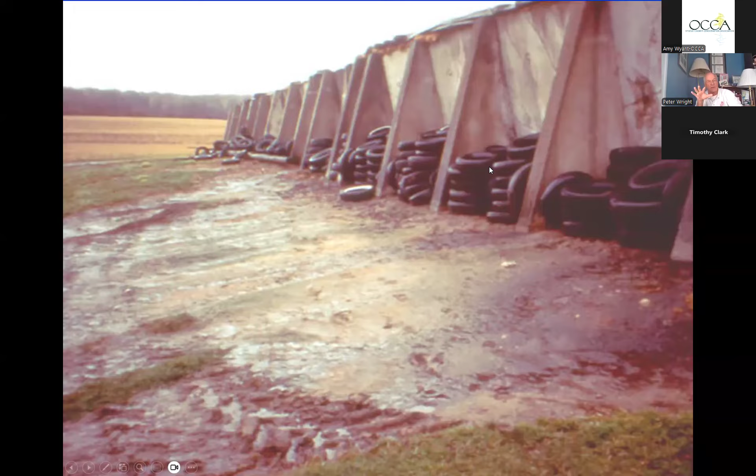Here's one of my favorite issues: the leachate that comes from stored silage. It's interesting that we're getting less of this because farms are paying much more attention to their harvesting, and if they harvest at the right moisture content, they get much less leachate. But there's still certainly the possibility of leachate, not only if you harvest it wet, but also as there's rainfall conditions or improper storage that result in this highly nutrient-rich contaminant that could leave the site.

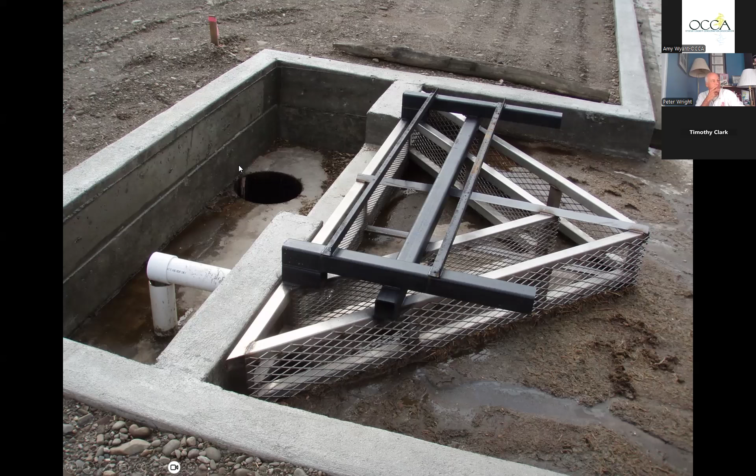You can see that over time it will get contaminated and plug. When that happens, one, you can go in and rake it off. Two, you can pick up the whole pieces and go spread it. That's certainly a possibility as well.

If you have concrete, it's got to be absolutely level, and it never is. If you have pipes, they have holes and they plug, which gives you uneven distribution as it goes out into the field. So a gravel mound might be one of the best ways.

We are collecting the low flow, taking the low flow to storage, the low flow that has the highest concentration, and then the high flow when it rains and it's less concentrated, we're treating out in a vegetative treatment area. And so far, to my knowledge, New York is the only state where we're allowed to do this, where then what leaves the vegetative treatment area is considered agricultural runoff, and not something you got to catch again and store it or spread it or something like that.

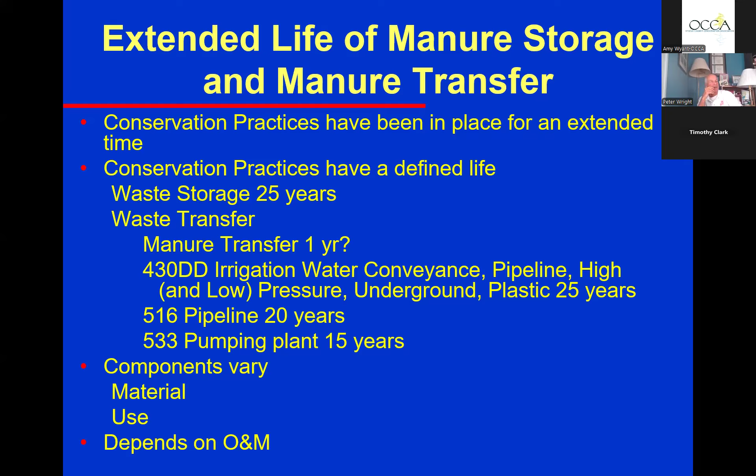I'm thinking of the manure transfer, the pipes. Did we have excessive pressure on them? Did they plug? Things like this. It does depend, right, on the material. Different materials have different life. The metal structures we have an issue with.

But that's why it's important to monitor your systems and perhaps maybe not build them like this. Might have been better to make it more uniform or a wider turn. So figuring out what the extended life issues are.

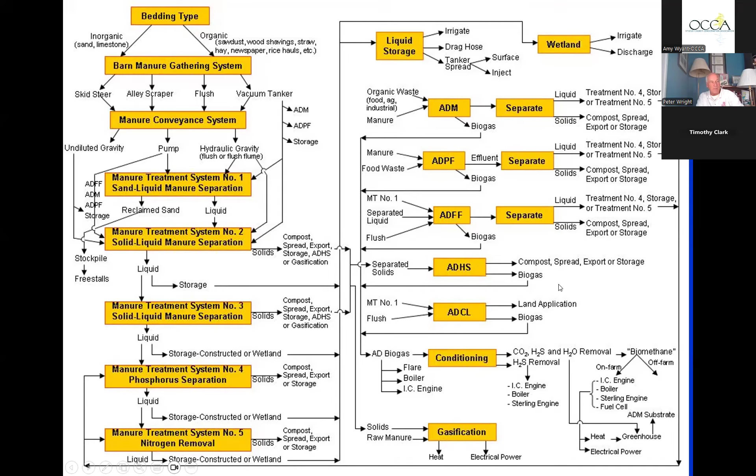And so you've got to have a reason to go through all this, but those reasons can involve your effort to move towards sustainability. So there's more and more issues on how to end up with different manure products through manure treatment.

You should learn about Newtrient. They have a website where they look at different manure management technologies and look at how they might work and help, they say, support farmers' social license to operate and build public trust. This is moving towards sustainability.

And the Newtrient site, if you go to it, has different scoring on different practices. So too often a farm is sold something, oh, we think this works, and then they find out that wait a minute, it might have worked once, but it's not going to work where you are, or it doesn't actually work. And so they score each of those practices so the farmers can make decisions. So it's a very useful place to look at different technologies.

There's the website, and you can get into it and see what different kinds of practices they might have. Solid separation is a big one. And I think solid separation has a wonderful opportunity, not only for manure handling, but also sustainability. The solid manure portion does not release as much methane as the liquid. And the separated liquid, once the solids are out of it, or a lot of the solids, doesn't produce as much methane either. So you end up having products that are easy to handle, maybe products that are useful.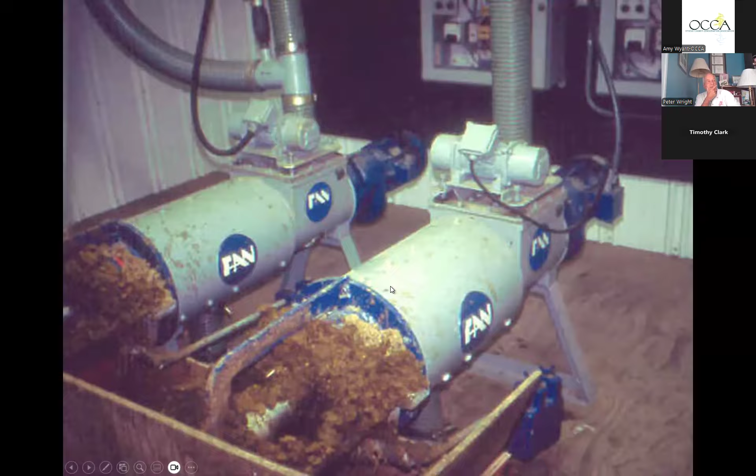So you can use some of those solids for bedding on some farms. And then at the same time, you're reducing your impact, your global methane emission impact. So that's handling manure solids. We also use sand for bedding.

And here's where the engineering comes in. You're looking for a sand that's not too coarse because you got the cow's hooves to deal with. You want a sand that's not too fine though, or you end up with a poor recovery of it. So you're going to be constantly bringing sand into the system. And so you're looking for a material that you probably can recycle to both save you money and still provide a good bedding.

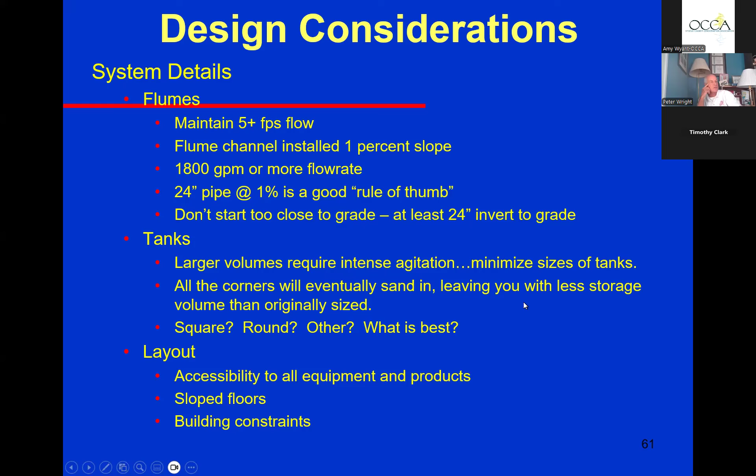So how do you design that? Again, it's a hydraulic aspect, right, of settling and velocities, in order to come out with a good layout of something that will recover as much sand as possible. How do you do it?

We also, though, can come up with anaerobic digestion to fully recover or try to recover as much renewable natural gas as we can. This is the same methane that, if it escapes, becomes a global warming issue. But if we actually catch it, it can be another profit on the farm potentially.

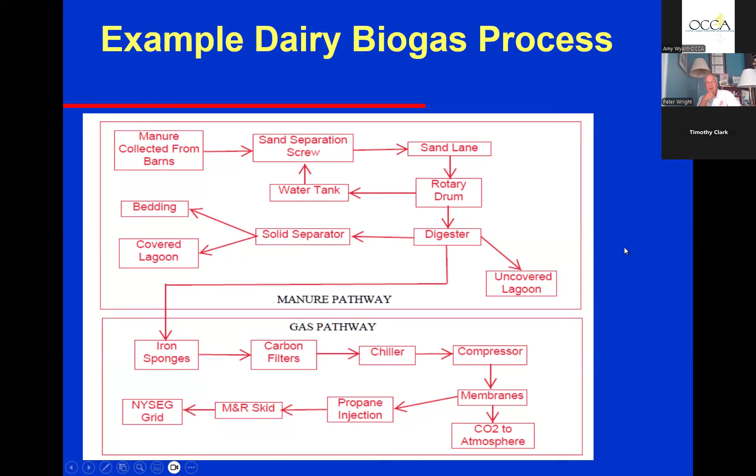And so we have upright tanks. We also have plug flow systems. These are more underground tanks. Different systems that we can put in place to actually encourage anaerobic digestion, to get rid of all the volatile solids from the manure system and collect the methane that they produce, to then help us to move towards sustainability.

We did talk about the gases that are produced, and the methane is a good one. Hydrogen sulfide is a very dangerous one. This comes into our safety issues, and I don't want to say constantly, but too often, any is too often, we end up with people that actually die from this. Got to think about it all the time.

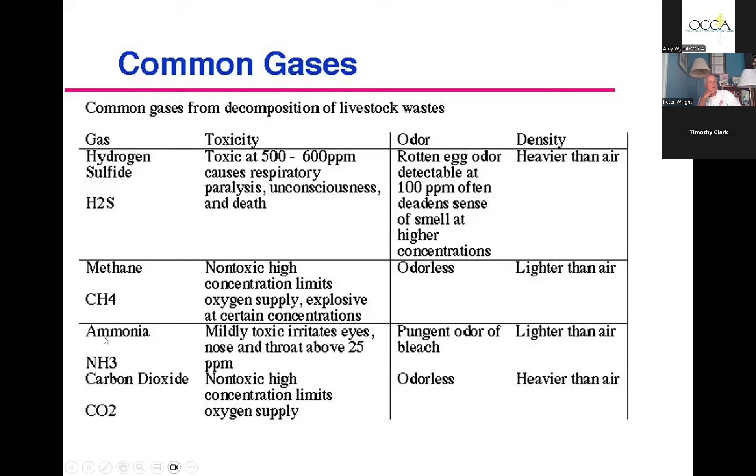We also have another issue with ammonia. The nitrogen in ammonia, if it's lost as a gas, as it can settle down, then becomes a pollutant if it settles in the wrong place. And so controlling the ammonia release is also an issue that is coming into play.

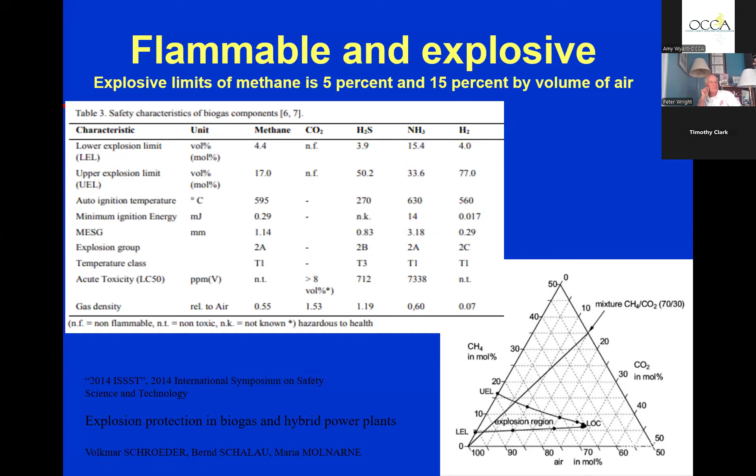We talked about that the methane, of course, is flammable. It is explosive. And there's actually a region where there's enough oxygen and enough methane that it actually could explode. So don't let that happen. Of course, if you keep the oxygen out, you can't breathe it. So you'll die from that, but at least it won't explode. But it's good to know where you are on this chart.

Now you're actually catching that methane and replacing natural gas in the system by using renewable natural gas. But the huge advantage comes in when you also import food waste and collect all the methane that would have been released from the food waste as it went to a landfill. And so a huge potential here for farms to really participate in global warming control by reutilizing food waste, not only for their nutrient value, but also for their energy value.

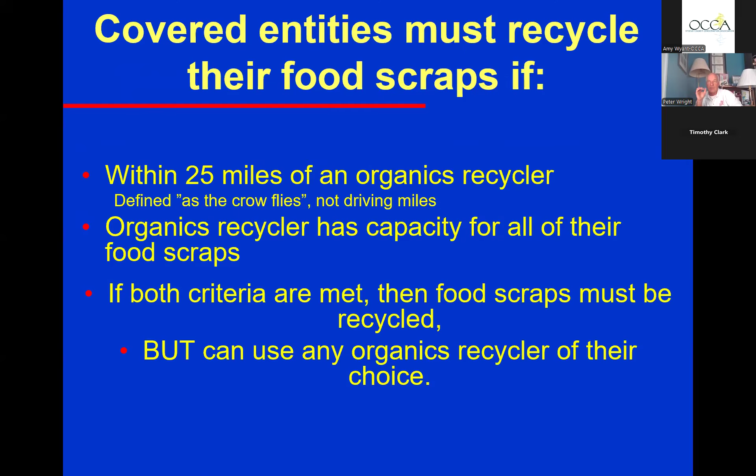The issue comes in as you're bringing the food waste in, you're also going to be bringing in extra volume and extra nutrients. So the farm has to deal with the management of the volume and the nutrient excess as they deal with it. They may get tipping fees for bringing the food in. They may end up with carbon credits, and certainly if the nutrients can be recycled and used on the farm, that's a benefit as well.

When you think about, okay, we're bringing this in, the other thing you got to ask is, bringing in the food waste, how much of the solids will be turned to liquid, and therefore are you going to increase the liquid volume that you're going to deal with? And we had these people that work through what would happen, how to size the different, how to anticipate how much additional volume you need.

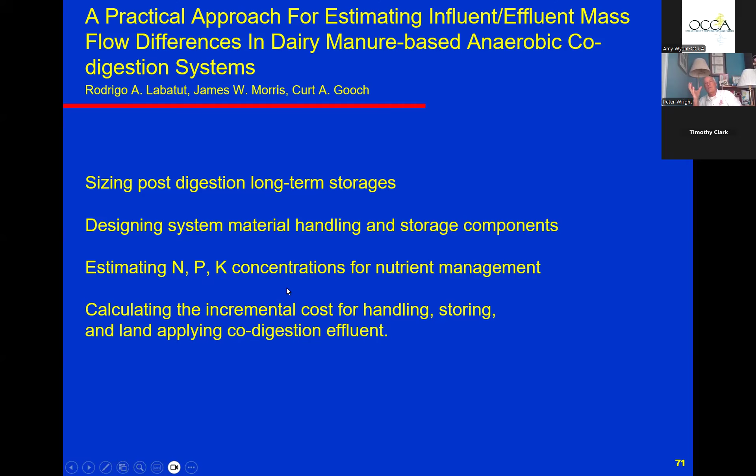As the food waste is converted to methane, the byproduct of that, of course, is carbon dioxide, which also goes up in the atmosphere, but you're left with a liquid product. So how are you going to design the system after that? And what happens to the nutrients after that? And trying to figure out the economics of it. Oh, yeah, bring in the food waste, you get paid a certain amount per gallon, but wait a minute, now you got to deal with the gallons that are left.

So what is that? So we can go through the math to figure that out, and mass in equals the mass out, versus going up in the atmosphere or caught in gas, but also the mass out in the liquid. Seems pretty simple, but there are many ways to figure out mathematically and in chemical analysis what you're going to get. And of course, you're estimating this amount, and what will be water, and what will be in there.

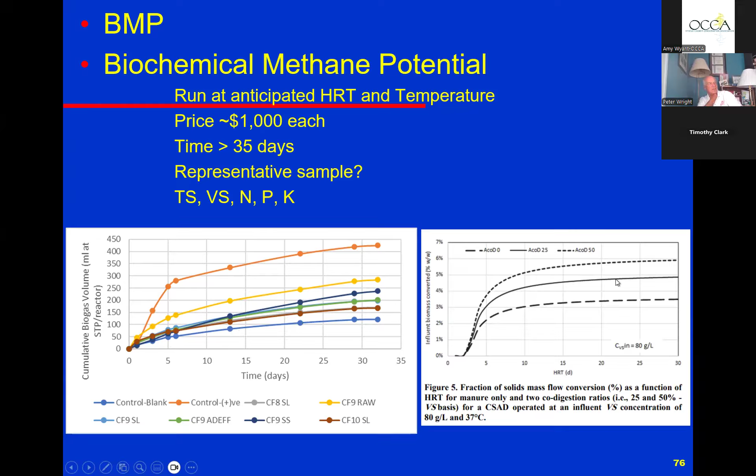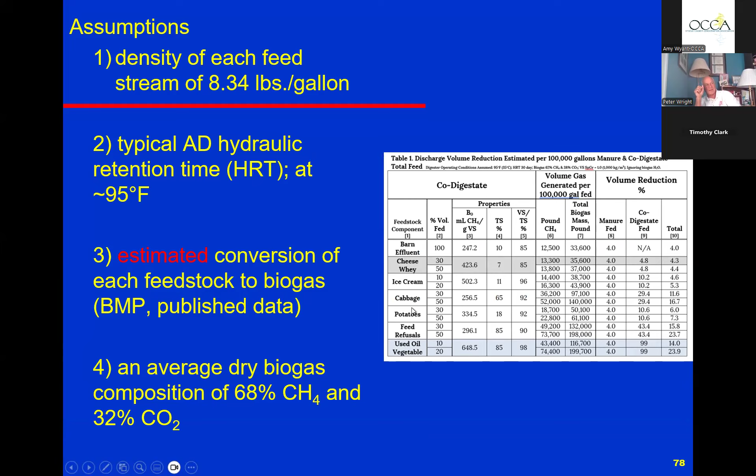Different food mixtures will give you different gas production, and therefore different nutrients and different volumes to deal with. So go through some math to figure all that out with different mixes, and then based on this, you can take the food waste you have and try to fill in what it looks closest to. Does it look closer to cabbage or potatoes? And you can come up with the volume reduction that you might get through the different mixes, so that you know how much to be prepared to store and deal with.

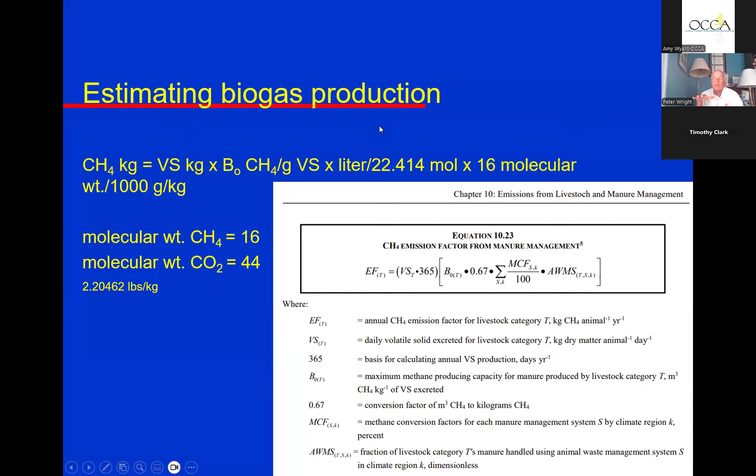And it all comes in how you're going to estimate the biogas production, which also is a useful thing, because if you think you're paying for the system by selling renewable natural gas, you want to know what your biogas production is. So again, you can go through that process of math to come up with the amount that you think you might get.

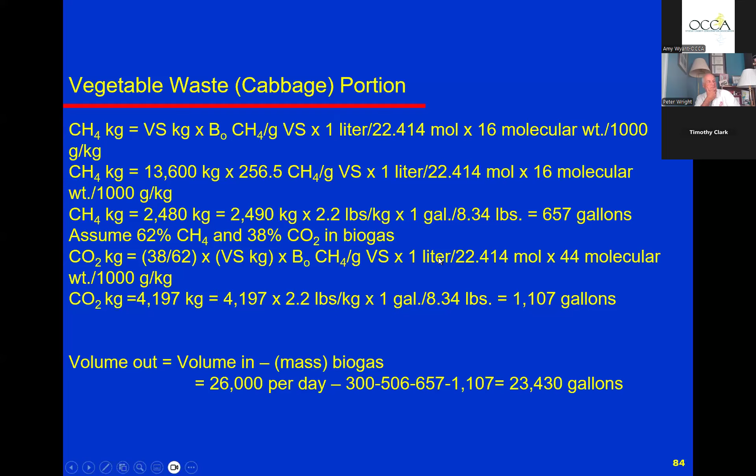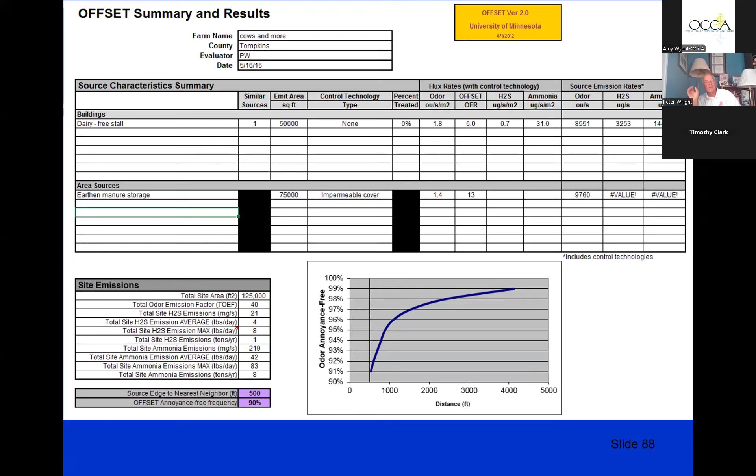There's also the issue of odor. This is also brought out by storing the manure. As you store the manure, of course, it smells worse. And so how do you deal with that odor? And we had engineers in Minnesota come up with a setback estimation tool where you put in the size of the dairy farm, you say whether it's treated, and you have different values that will help tell you what kind of odor you can expect at a distance. We haven't implemented that in New York State, but you can imagine people might be interested in something like that, which is an additional engineering aspect.

So some conclusions. One, if you're going to be an ag engineer, you need to have some ethics. The ASABE, American Society of Agricultural and Biological Engineers, has an ethical statement for you to look at. If you want to get more involved, the National Society of Professional Engineers also has ethical issues that you got to deal with.

You got to think about your liability. There's insurance for that. People underestimate this, and this is an issue for somebody that wants to get into ag engineering. If you get into it a little bit, your insurance may go up. So you've got to get into it in a big way so that you can spread the cost of that insurance over many projects. I put payment here.

Farms are operating on a narrow margin. If you work with a farm that's on too narrow of a margin, they can't pay you. So that becomes an issue that you've done all this work and you're not going to get paid. So think about that.

I think to get into the engineering market, if you're like a civil engineer, you need exposure. How do you let farmers know that you're willing and able and have the ability to do that? And I think the best way to do that is to actually work with partners, specifically either NRCS or soil and water conservation districts. They work with the farms, and if you can work with them, one, it can help you reduce your costs, right? Use the district people as your eyes and ears. I think that's a very useful thing.